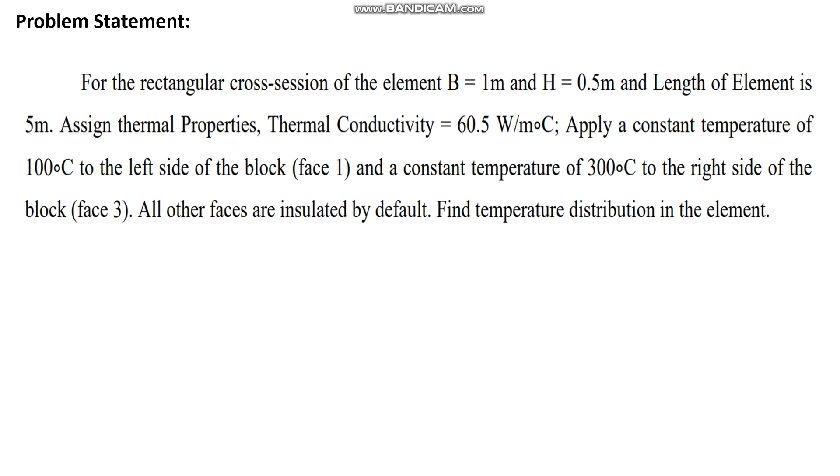So let us jump back to the ANSYS Workbench screen. Here we have to select steady state thermal because this problem belongs to the thermal domain. Select it, drag and drop on the main screen, and let us check the engineering data. Right click, edit.

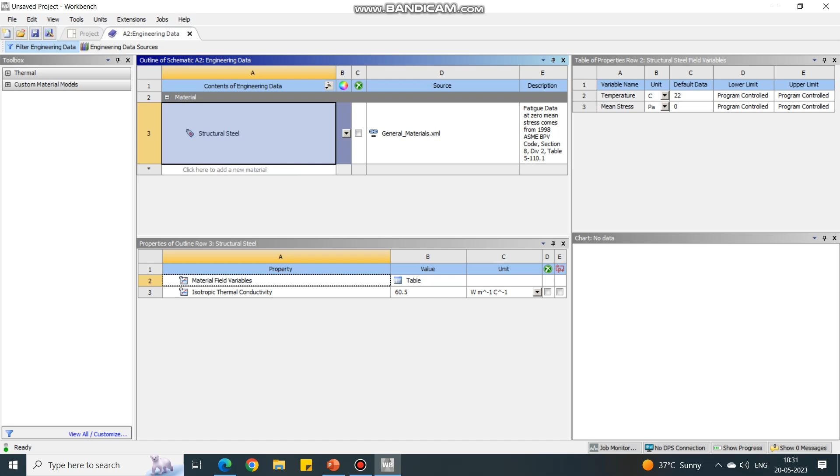A window will appear for structural steel. Check the thermal conductivity value, which is 60.5, and our problem also demands the same value, 60.5. That means the material we selected is correct. Go back to project. Under geometry, right click and select DesignModeler to create the geometry for this problem. It will take a few seconds. Wait.

Before that, you have to check the units used in the problem. The length units are in meters, so no need to change the units. But before modeling, see this black and white strip. It is showing this distance equal to 30 meters, and we don't want it to be 30. So we have to zoom until it shows 1 meter or 0.5 meter at least.

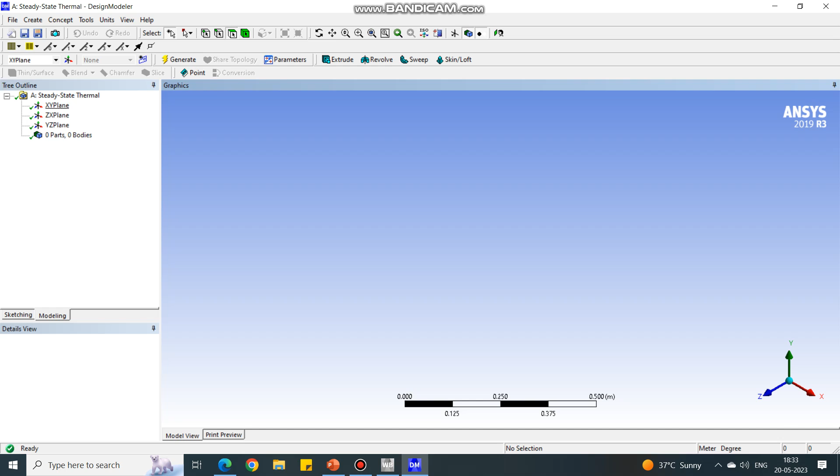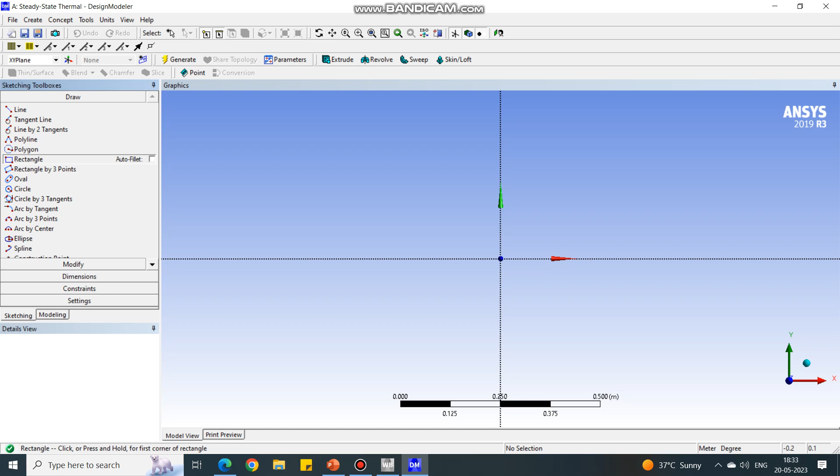Now select the XY plane, right click and say look at. The plane is now oriented towards us. Again you have to zoom because the geometry is very small, as shown by the black and white strip. Now go to the sketching tab. Select rectangle because the cross section is a rectangle, and using two corners create a rectangle. Under the dimensions tab it is already showing general, so keep it as it is.

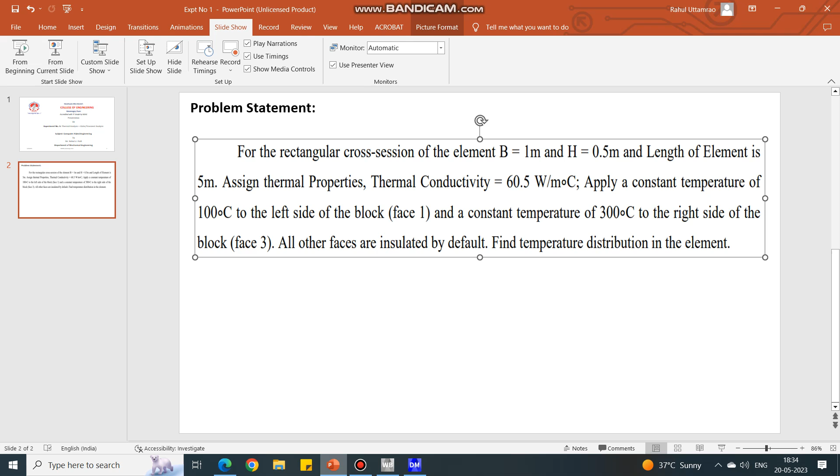Select the horizontal line and the vertical line, then the horizontal axis and horizontal line, and the vertical axis and vertical line to create a rectangle symmetrical about the XY axes. Now we'll give the inputs for height and breadth. Height is 0.5 meter and breadth is 1 meter.

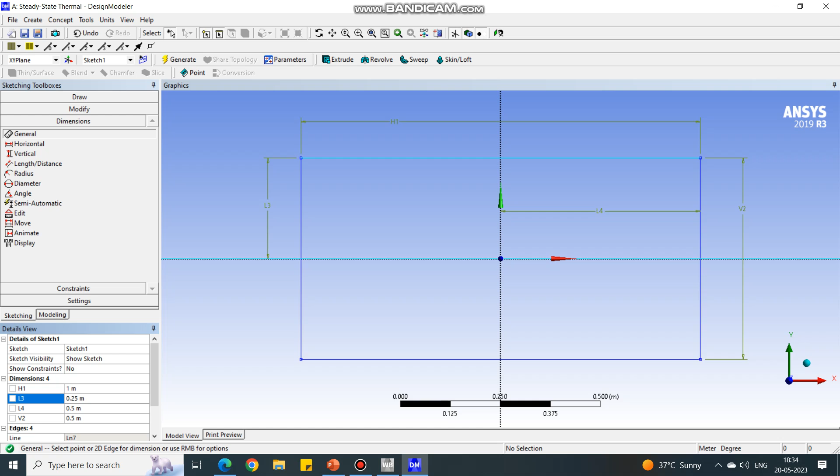I'm giving this as 1 meter, and this distance as 0.5 meter because I want it to be symmetrical, and the height is 0.5 meters, so I'm inputting 0.5 meter as the height and this as 0.25. Now the section is created. Go back to the modeling section; under modeling we have to create an extrude, so select the extrude option.

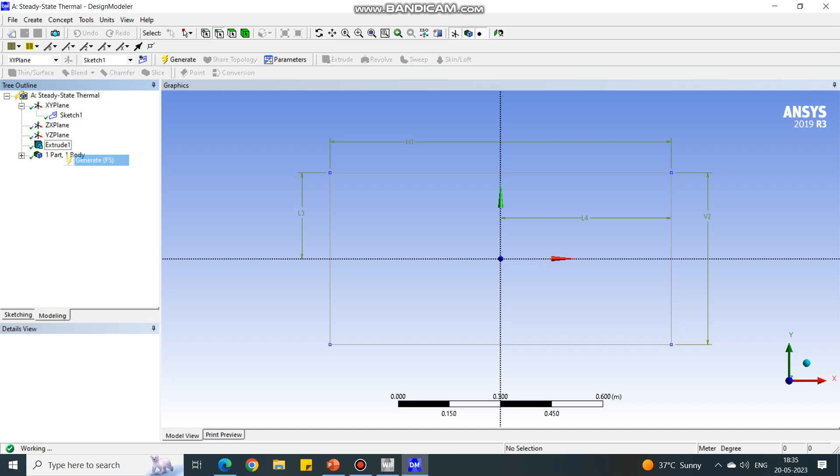Under extrude, select the XY plane, and under XY plane sketch 1, say apply. Now sketch 1 is selected; give the depth. The depth is actually the length here, which is 5 meters. Give input as 5, select extrude, right click and say generate. Now the section is generated. You can reorient it. This is how the geometry is. Close the DesignModeler: file, close DesignModeler.

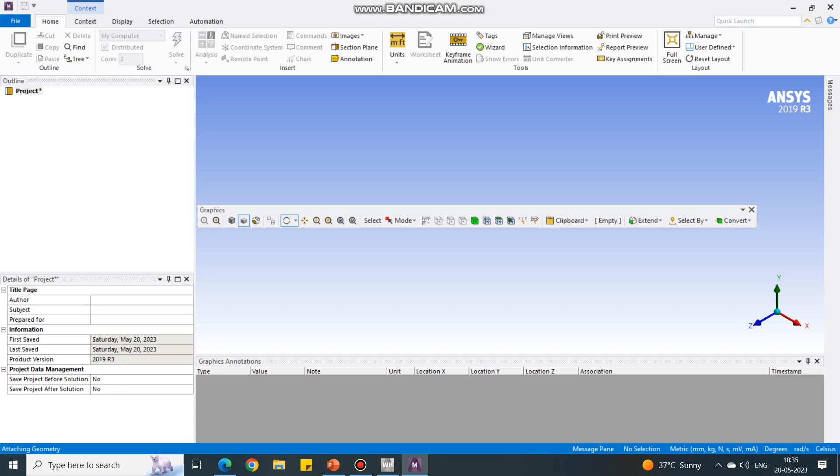Now select model, right click the model option, and it will open the ANSYS Mechanical window. It will take a few seconds. Now it is opening. Until the geometry is fully opened, the process is not complete. Now it is open. I'm just reorienting my screen.

Select the mesh option, right click it and say generate mesh, and we'll see how the auto mesh is. Looking at the auto mesh, the elements look ideal, so no need to modify this mesh. Select steady state thermal, right click, say insert temperature.

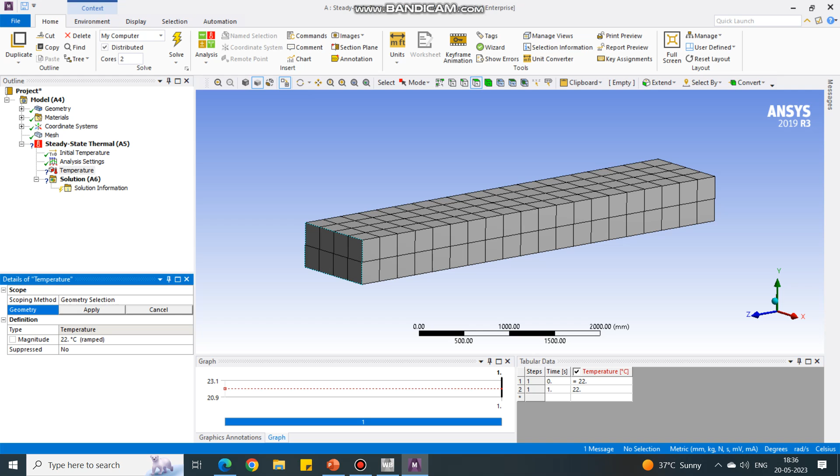This is the left face and this one is the right face. On the left face, the temperature value is 100 degrees centigrade. Click on the left face, say apply and change the value to 100 degrees centigrade. Insert one more temperature, select the opposite face, which is the right face, say apply and give the value as 300 degrees centigrade.

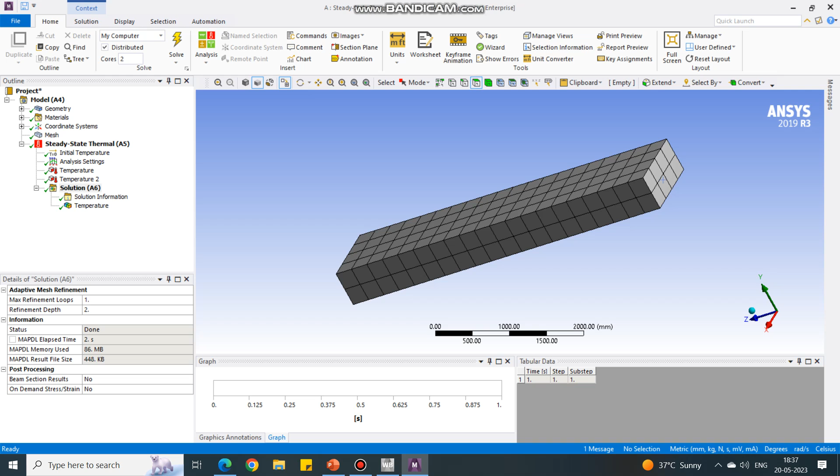In the solution tab, insert thermal and select the temperature option because we want to see the temperature distribution. Select the solution, right click and say solve. The software will solve this thermal problem and give us the temperatures as output. To see the output, select temperature, and that's how the temperature distribution is shown.

See, the maximum value is 300, minimum is 100, and for all other elements it is in between 300 and 100. You can animate these results by clicking on the play option, take an image of this and note down the maximum and minimum values. That's how the thermal analysis experiment is to be performed.